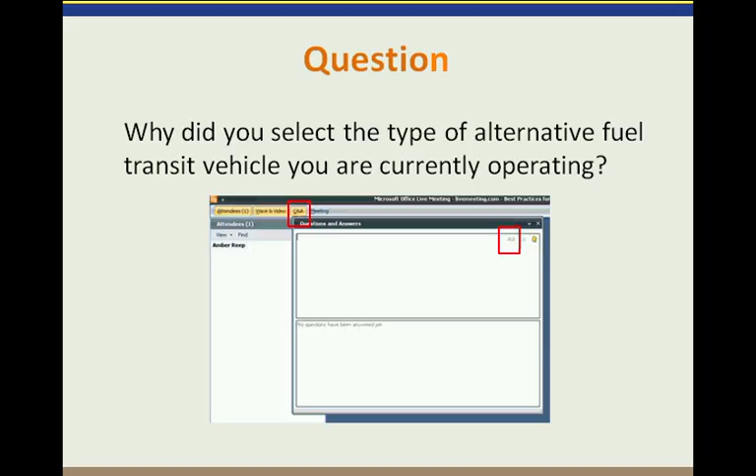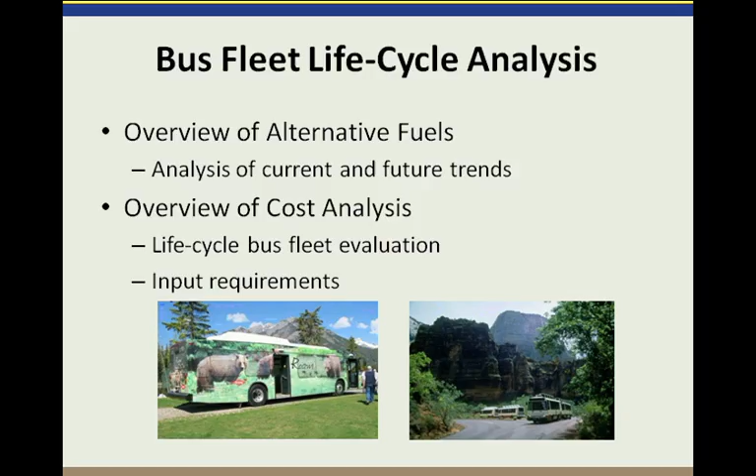Thank you again for sharing the results of our polling questions. I'd like to get started here with just giving an overview of the different fuels that we have analyzed for use in transportation, and then get into a little bit of the overview of how this cost analysis will work.

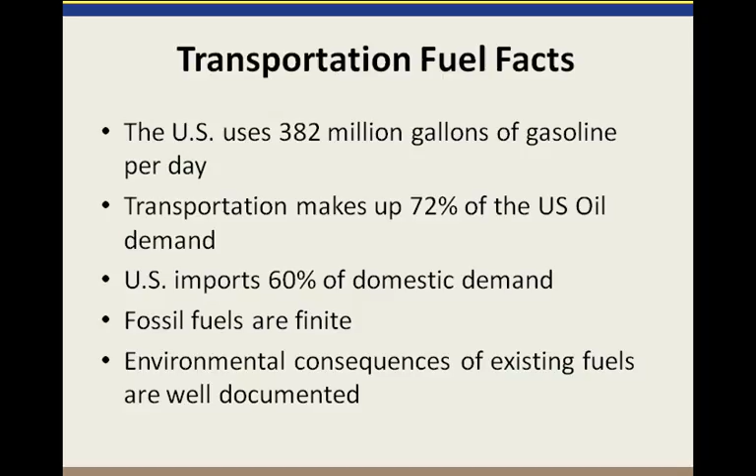As transportation people, why should we be concerned with alternative fuels? It sounds like a pretty obvious question with obvious answers, but just to put it into perspective, when you look at industrial, residential, commercial, and transportation sectors of our economy, transportation makes up almost three-quarters of the demand for oil in the United States today. I think it's pretty well known that we're importing well over half, and have been for over a decade, the oil that's required for our domestic demand. I think we're pretty aware of the environmental issues associated, particularly greenhouse gases and other regulated emissions. And the fact that we run this transportation system in this country based on a finite resource, we need to keep striving to find cost-effective and more environmentally friendly fuels to fuel our system.

So as we think about trying to help you decide what may be the most appropriate alternative fuel for your fleet that you're running at your parks or at your facilities, this model that we're going to talk about today is really a decision support tool.

It's not going to tell you the answer, because there are lots of considerations that go into this decision making. First of all, what is it that you're trying to achieve? Are you trying to demonstrate that your agency is working towards energy independence? Are you at a park where noise, air quality, or groundwater issues are what you're trying to deal with?

Is the fuel even available in an economic manner in your region of the country? If you bought some new whiz-bang sort of vehicle, are you going to have the technical support to service these vehicles because of their maintenance?

Some fuels are far more appropriate for warmer weather climates and experience some difficulties in colder weather. If you're having to turn your fleet pretty quickly and it's in constant use, some fuels require significantly longer fueling times than traditional diesel or gasoline. Same thing with vehicle range.

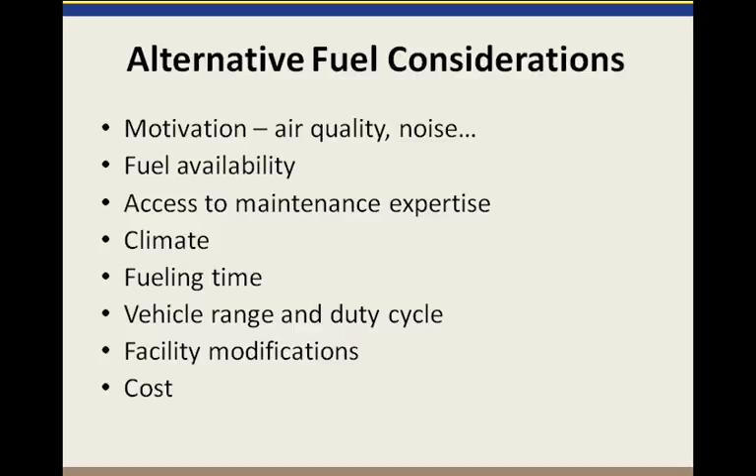The top bullet and the bottom bullet, at a minimum, are considered in this model as a way to help guide you towards your decision as to what alternative fuel vehicle you may want to purchase. I'm going to try to quickly go through this set of fuels, and what we've developed is a fairly simple, almost like a Siskel and Ebert thumbs up and thumbs down approach to the pros and cons of the different fuels.

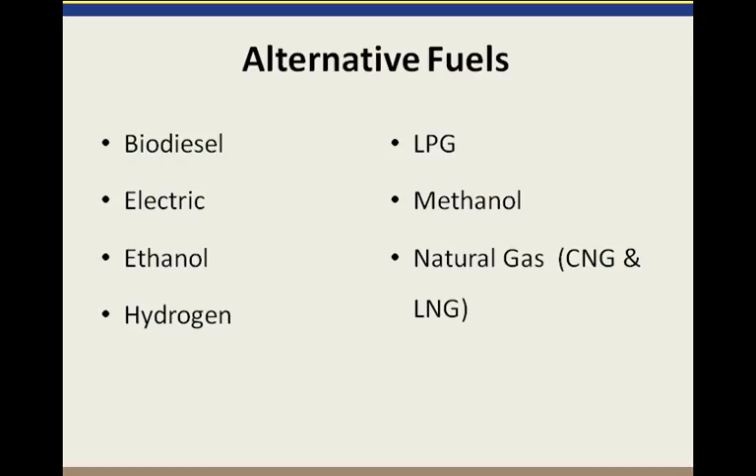We'll talk about electric, although not technically a fuel. We put that in there as well because of the use of electric vehicles and their up-and-coming use. So as a baseline, we'll use gasoline and diesel, where because of carbon dioxide, carbon monoxide, NOx, volatile organic compounds, and so forth, we give them a thumbs down for emissions.

Supply is not intended to mean how much of it there is in the globe, but whether it's fairly easily accessible in the U.S. market. Cost, safety, delivery - that's a little bit different if you're talking about some of the exotics like hydrogen, or even natural gas if you're not near a natural gas pipeline. And then the energy content, which is basically measured off the gasoline diesel base of BTUs per gallon, because the lower that number is, the more of it you will need to generate the same energy. Conversely, the higher that value is, the less of it you will need.

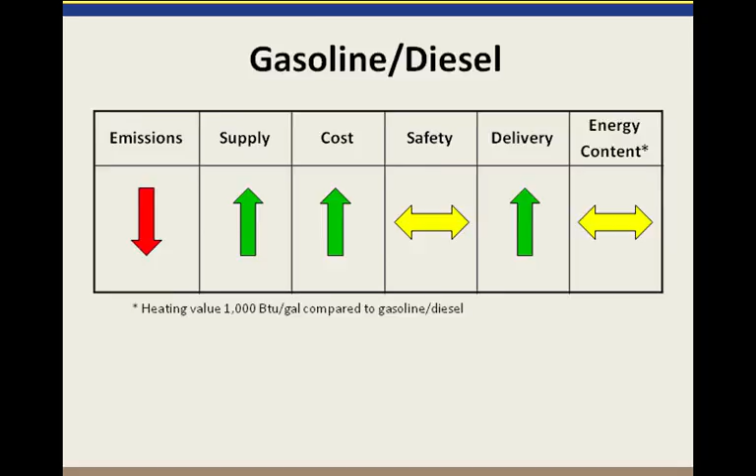So let's start with biodiesel. We refer to biodiesel and ethanol and these biofuels as really sort of transitional fuels to take us to our energy future. I noticed that several of you are using biodiesel, but for those of you who are not using it, it does have some very beneficial air quality attributes.

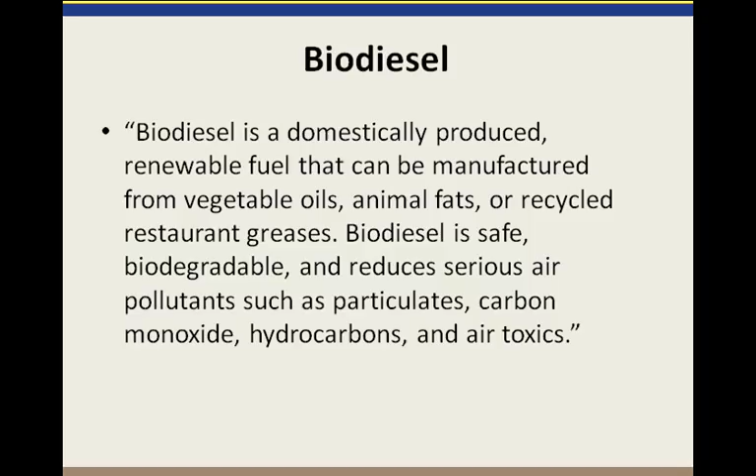But I want to say here, biodiesel is not just yellow grease from the McDonald's down the street, or from a restaurant that you may have in your park. There's an ASTM standard for biodiesel, and although there are hobbyists who run vehicles on straight yellow grease, restaurant greases can be used as an input to make biodiesel. But in terms of the reliability of your engines, we recommend that you use certified ASTM biodiesel.

Now we'll talk a little bit about compression ignition engines and spark ignition engines. Very basically, spark ignition engines are like a gasoline engine with a spark plug. Compression ignition engines are like diesel engines that do not require a spark plug, but the combustion itself ignites the next cycle.

The main feedstock of biodiesel in the U.S. these days is soybean, but it can be made from waste products, canola, peanuts, cottonseed, many different inputs. We'll talk about this with ethanol as well. The controversy over biofuels when food stocks are being used as inputs can be fairly controversial and a legitimate concern for people using these.

You can use biodiesel at 100% blend, that's called B100. The most common use is a 20% biodiesel, 80% diesel blend called B20. You can find commercially available blends from B2, B5, all the way to B100.

So, pros and cons. You can use biodiesel without virtually any modification if you're using it in the B20 blend. There are more and more production facilities creating and blending this stuff all over the United States. With the new sulfur standards for diesel, the ultra-low sulfur diesel, biodiesel could actually help with one of the drawbacks of the new diesel fuel in terms of adding lubricity to the engine so it doesn't wear out. It also has some fairly decent air quality emissions profiles.

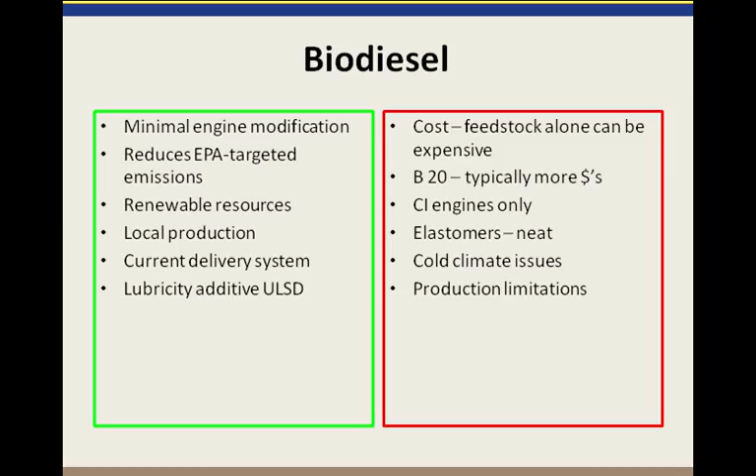We give it a thumbs up for emissions, neutral on supply and cost. As we watch the cost of biodiesel, depending on the area of the country you're in, it can actually run lower than regular diesel or ultra-low sulfur diesel, or can run a little higher depending on local markets. It's relatively the same in terms of energy content, and on delivery and safety, we give it the thumbs up.

When I say delivery here for biodiesel, the stuff actually requires no additional refining or anything. If someone locally is producing ASTM standard biodiesel, they could just splash blend it in a tanker truck, and it actually just mixes up on its way to deliver to your facility.

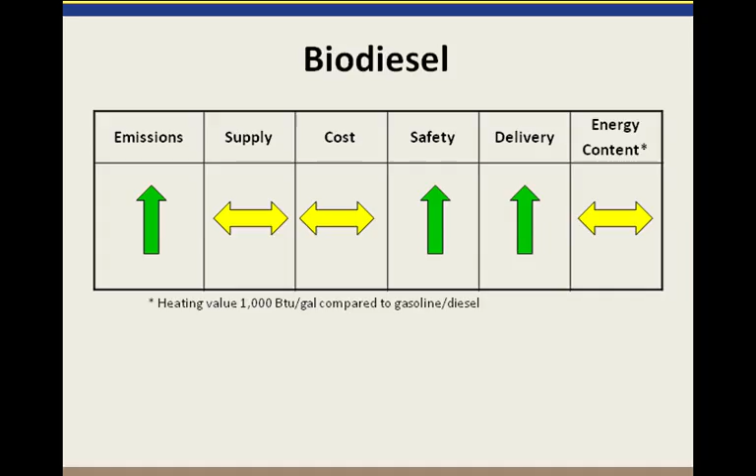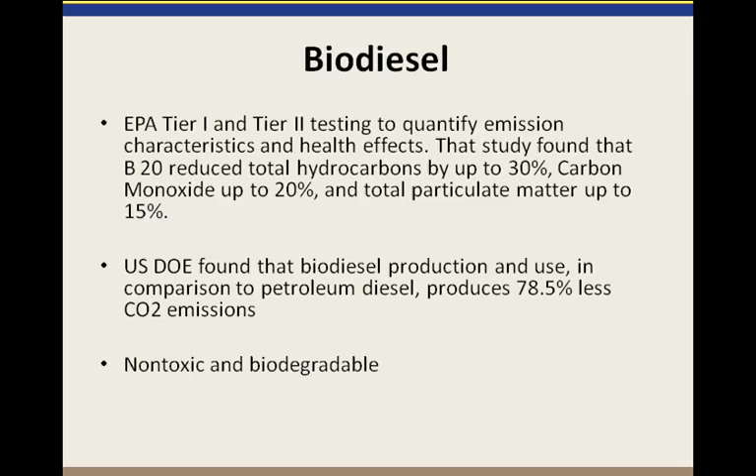It is non-toxic and biodegradable, and you can see some of the statistics there that I've put on the slide in terms of what EPA and DOE have found. Particularly the carbon dioxide emissions are a real plus with biodiesel. And again, it's readily available and easy to implement, particularly at the B20 blend.

Now, ethanol. A lot of news these days about ethanol. Well, what is it? It's essentially alcohol - moonshine, essentially. It's fermented from virtually anything that grows. Unfortunately, most of the ethanol being produced in the United States is coming from corn, and there's competition for land, fertilizer, and agriculture capacity.

A couple of years ago, there was actually a run-up in food costs because of a shift of agriculture production for the use of ethanol. Ethanol is used in the spark ignition engine, and this is the typical engine you'd find in your automobile - it uses a spark plug. It's been around as a fuel for a very long time.

It goes back early in the last century, but in the 70s, those of you who are an old guy like me remember gasohol, which was a blend of 10% ethanol, 90% gasoline. In the oil embargoes and shortages of the 70s, this became a pretty popular fuel, particularly in the Midwest.

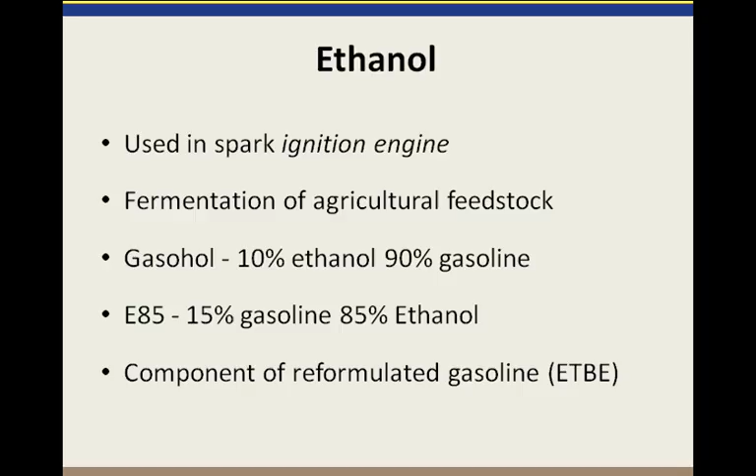Well, the advantages of ethanol - we're going to talk about methanol, which is another kind of alcohol, in a second. While ethanol has lower energy density than gasoline, it is higher than the other alcohols. It can come from renewable feedstocks - it can be made from waste grass clippings, waste food products, anything that you could distill.

It is water soluble, and it has been being introduced into fuels, particularly in air quality non-attainment areas, where they have to add oxygenates to the fuels.

ETBEs have replaced MTBEs because of methanol's really toxic nature and the issue of leaking underground storage tanks and methanol getting into the groundwater. Ethanol has taken over as an additive.

Now, most vehicles on the road today that have been built since the 80s can use up to a 10% blend of ethanol. But this E85 that's being promoted around the country, which is 85% ethanol, requires a flex fuel vehicle, and at last check there were over 6 million of them.

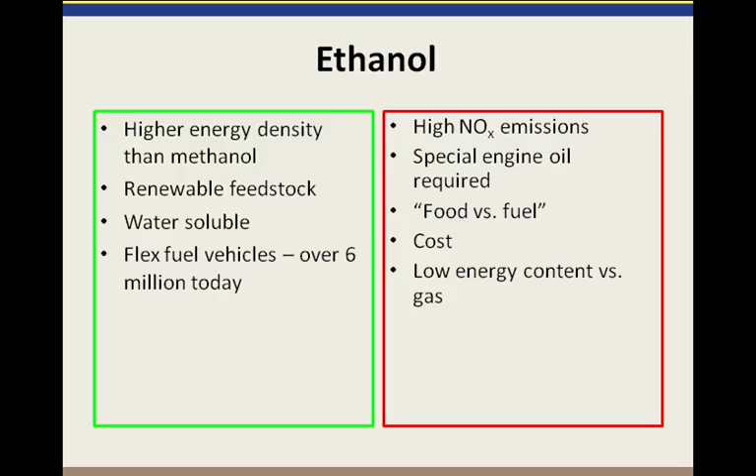The downside, depending on the feedstock in the market for what's being used to make the fuel, is it can be more costly, particularly without subsidies. We get into this competition by using food stocks as inputs. It does not have a terrific nitrogen oxide emission profile, and it has about 30% less energy content per gallon than a gallon of gasoline or diesel.

It does, because it's so highly oxygenated, have a terrific impact on reducing greenhouse gas emissions. Although there's lots of debate on ethanol, and some scientists have shown that it requires more energy input than what you get out. There is CO2 that is released as you distill whatever you're doing to make the alcohol. The counter argument is that because it's being made from crops, the typical CO2 cycle takes care of that, and there's no new CO2 being introduced into the atmosphere.

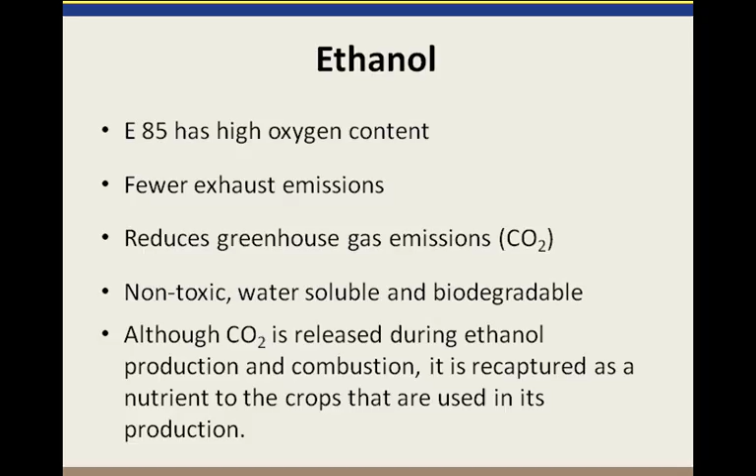So we give it a thumbs up for emissions, neutral on supply. Cost, we give it a thumbs down as it relates to gasoline, because typically it does run a few cents more, and when you combine that with the fact that you need about 30% more of it to run, you see the energy content with the red arrow pointing down. Those are the two negatives.

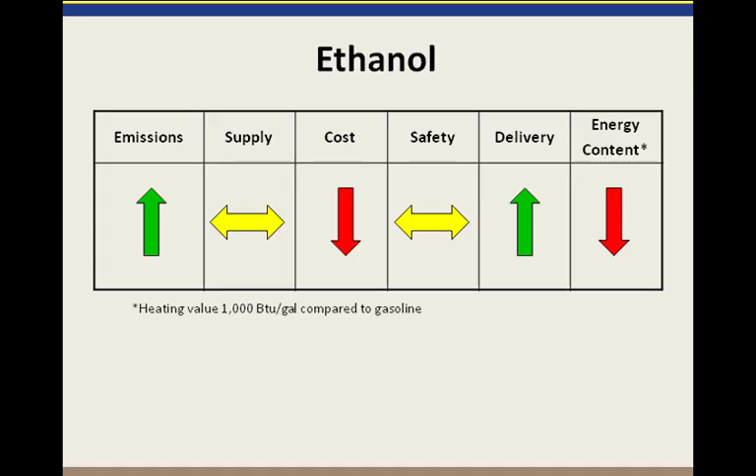Again, there's no issues, particularly at lower concentrations, with delivery or fueling infrastructure or that sort of thing. We've found that Mammoth Cave is using ethanol in their fleet vehicles, and I think that may be the only one. Now, what we are beginning to see - we'll talk about hybrid electric vehicles in a few minutes - is the use of E85 in engines that are used in hybrid electric buses, particularly the heavy-duty large buses.

Methanol I won't spend a lot of time on. This was once thought to be a viable transportation fuel. It is some very nasty stuff from a handling and an environmental standpoint. But it's alcohol that's made from the distillation of wood.

Now there are some small scale demonstrations in the U.S. where methane from landfills is being captured to produce this as a fuel, and that's pretty laudable. But on any wholesale level, people have pretty much, for the time being, given up on methanol as a viable transport fuel.

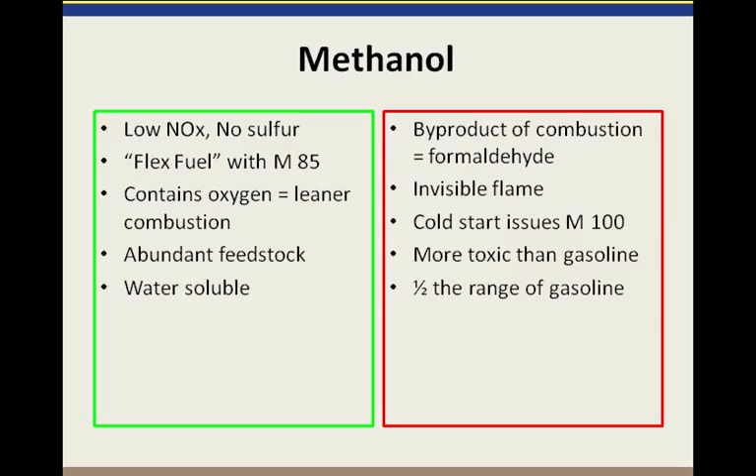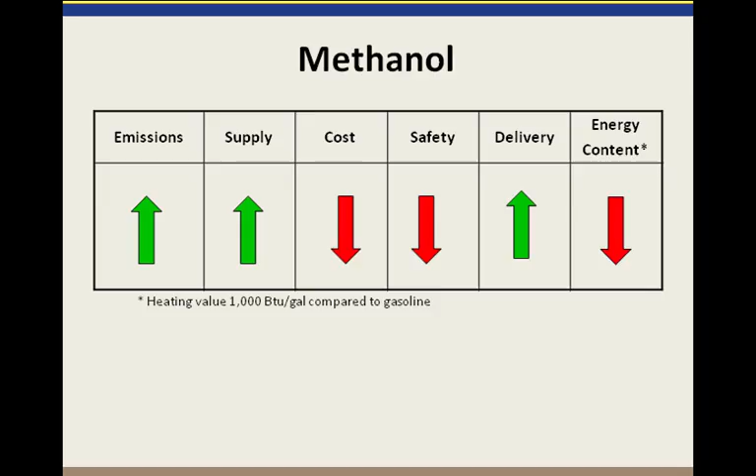Because of the low sulfur and low NOx, we've given it a thumbs up for emissions, but on energy content, safety - because of the invisible flame issue and also the toxicity level of the stuff - we've given a fairly negative rating. And again, it's not particularly relevant in that not many folks are using this anymore as a transportation fuel.

Excuse me one second. I'm battling a cold here, and I don't want to cough in everyone's ear.

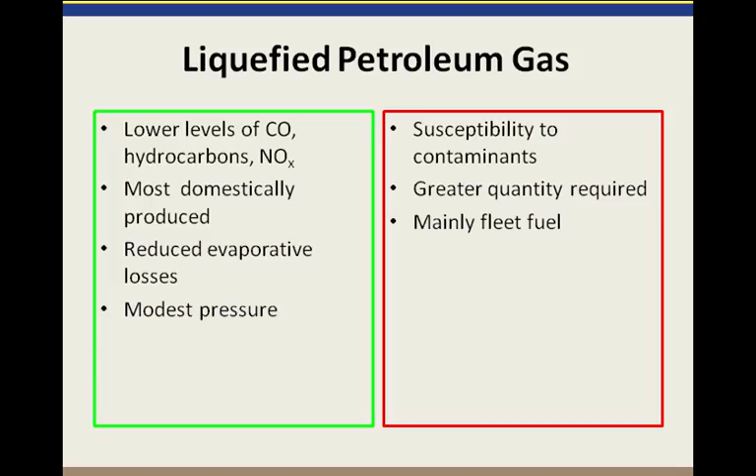So where it is used, it's mainly a fleet kind of fuel, which would be relevant for you all, where there's centralized fueling facilities. But there are some downsides, including its lower energy content, which requires more fuel to go an equal distance.

On the rating scale, the LPG, depending on what part of the country you're in, from a supply standpoint, you may or may not be able to get it. And to run a vehicle fleet, you need more than the 10-gallon or 20-gallon containers you use for your barbecue.

But it does have a really nice emission profile, relatively less expensive than gasoline or diesel. And as I said earlier, the energy content is probably its biggest drawback.

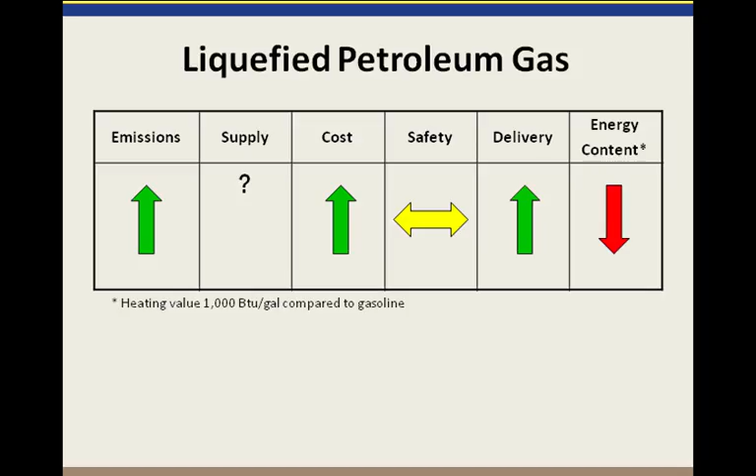Again, Acadia, Zion, and Mammoth, if you're interested in talking to folks that are using this and getting their experiences, as Amber said earlier, there's a resource available in the handouts that gives you the contact information.

Now, as I said in the very beginning of the presentation, we were going to talk about electric. It's not technically a fuel, it's an energy delivery method.

And when you think about electricity and its pros and cons from an environmental standpoint, you've got to think about the wells-to-wheels concept, the whole energy chain. If the electricity being generated is coming from some high-sulfur coal from an antiquated power plant, then while locally you may be gaining in terms of air quality, the point of generation may be a pretty nasty thing.

Even with the amazing advances in battery technologies, it continues to be a fairly poor transportation source of energy, because the batteries weigh so much, and in transportation you've got to drag around the energy source with you, unless you're getting electricity from a catenary on a light rail system or that sort of thing.

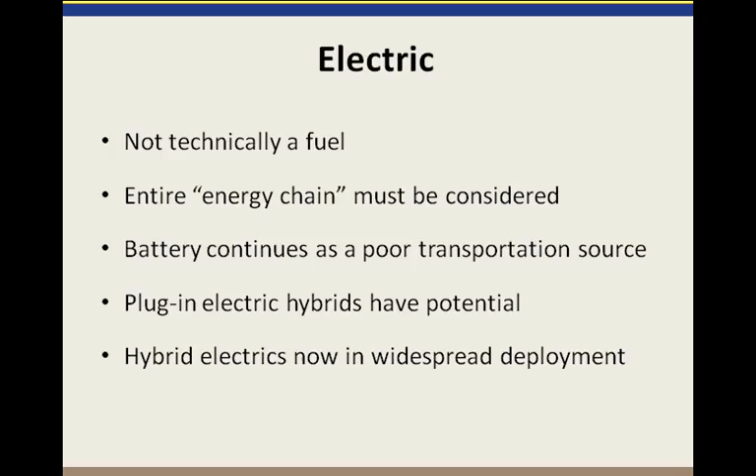There are plug-in hybrid electric buses being developed and deployed. I'm not aware of any in the U.S. yet, but in Asia they are coming on.

Without getting into a technical discussion about the different kinds of hybrid electric drives, I'm going to talk about a very simple one called the series system, which seems to be the choice for a heavy-duty bus.

When I say heavy-duty bus, I'm talking about the 25 to 40-foot buses that would be used to carry anywhere from 20 to 40 people. They're really moving away from the really complicated systems that you see in the Toyota Prius, Honda Civic, and more toward a very straightforward kind of system.

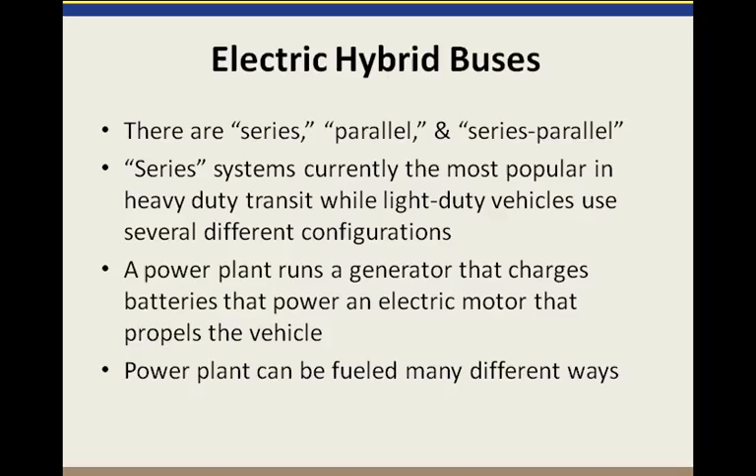Which I have a slide here, basically what you have is an electric bus. The bus is driven off of a giant electric motor, and then the engine just turns the generator, which replenishes the battery or gives direct power to the motor if it needs it.

Of course, there's sophisticated regenerative braking systems and lightweight materials and those sorts of things that go into these buses that help extend their range. But generally, that's the way it works.

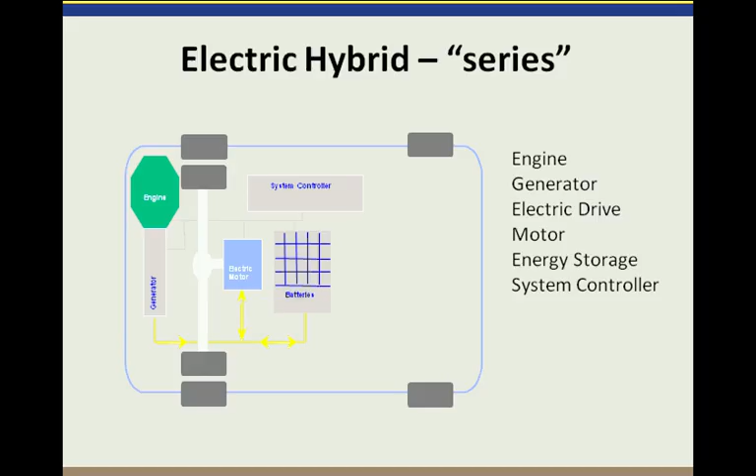Engine, which can be fueled by gasoline, diesel, E85, or hydrogen, runs a generator. Generator creates electricity, runs the electric motor, and stores energy in the batteries for when more energy is needed to go up a hill or whatever.

When we look at buses, that's not to say there aren't pure electric vehicles out there, and there have been plenty of demonstrations of the use of them.

Excellent vehicle to be used where noise is a consideration, and you don't want that in a park or some environment where you're very sensitive to the noise that one of these big buses can put off. But because the battery technology hasn't advanced to the point where you can get the range out of these things, pure electric buses in a lot of applications have been waning.

This is, again, one of those things where you have to think about the operating environment that you're in. If you're running these vehicles in the Everglades where it's flat and there's no hills, you could get a lot more range out of them than if you were trying to move through Going-to-the-Sun Road up and down the mountains in Glacier. You wouldn't get very much range out of an electric bus.

So what has evolved are the hybrid electric buses. And as I say, any kind of an engine can run these. So we see CNG engines running them, even hydrogen internal combustion engines, which we're going to talk about in a few minutes. That's not a fuel cell. It's actually using hydrogen in a liquid form in a traditional kind of an engine. The huge advantage to it being the air quality benefits of using hydrogen as a fuel. But even in the urban bus settings, we're seeing E85 being used to, again, power an engine that runs a generator, to propel electric engine to move the bus, and CNG.

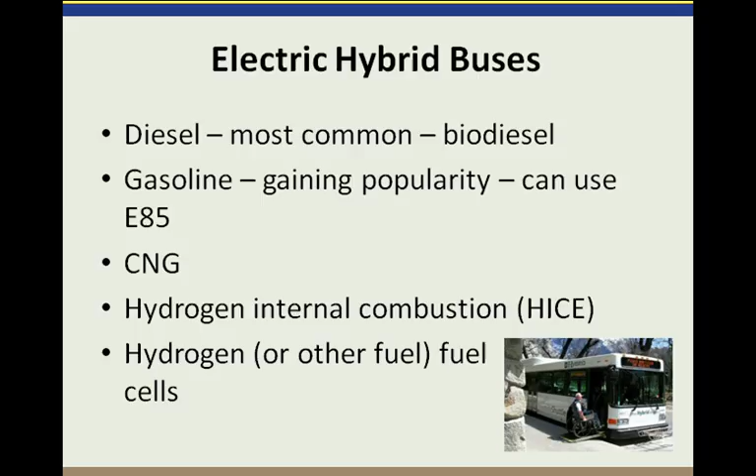Now, I mentioned fuel cell, and fuel cell has sort of been the holy grail of transportation technologies, and I've been involved in this for several decades, and it always seems to be just out of reach. It's another 10 or 15 years shy of commercial viability. But what the fuel cell is, it's essentially a battery that you add fuel to.

The reason that the hydrogen fuel cell is such an attractive potential source is that water and heat are the only byproducts aside from the electricity that you're getting if hydrogen is used in a fuel cell. Now, it's not a new technology. As you can see, it was invented in the 1800s. Other fuels can be used, but again, the holy grail has been the hydrogen fuel cell because of the only byproduct besides the energy that you get is water and heat.

Extremely expensive. Still not sure of the life cycles of these things.

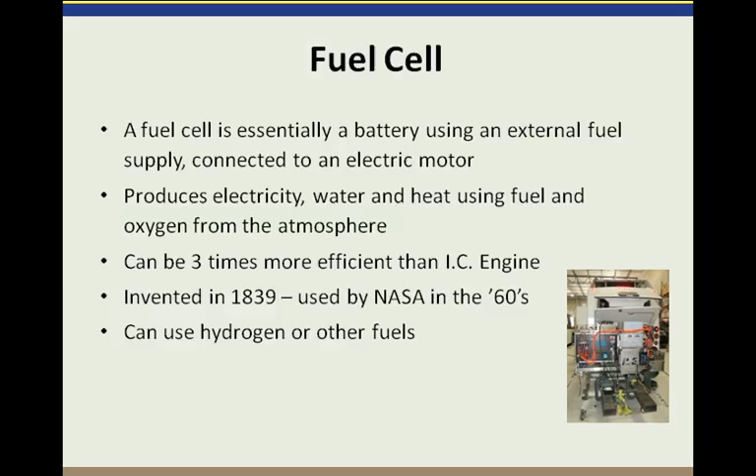So lumping all the electric together, we'll say on the plus side, there's no tailpipe emission if it's a pure electric bus, and even if it's a plug-in hybrid vehicle, agencies and individuals will be able to soon take advantage of charging these things off peak when smart grid technologies come to the country universally. And in fact, you'd be able to sell energy back to the grid at peak times if your vehicle were to be plugged in.

But electricity in general, I think one of its biggest pluses as a transportation energy source is the fact that you can invest in the air quality mitigation technologies at a power plant at a much heavier rate than trying to do this with millions of vehicles moving along the highways. You can spread the investment over the lifetime of a power plant as opposed to investing in something on vehicles that are only going to last 10 or 15 years.

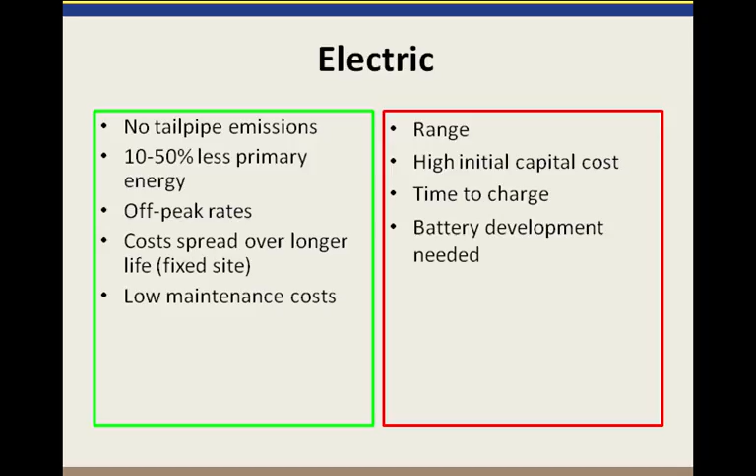Again, the downsides, we've talked about the range. Because of the sophisticated regenerative braking in batteries and other materials, they can cost a lot. And in our example, you'll see what a full-size bus cost differential is for a hybrid electric versus a traditional diesel-powered bus. So the only energy source that we give two thumbs up for emissions and supply, again, cost.

We're doing some more research. My colleague Cecilio and I are actually doing some more research now on the relative cost per kilowatt hour energy equivalent to how much traditional fuels cost. But we give it a thumbs down on energy content mainly because of the battery capacities and the range.

I think we have a question.

Before we move on to the next fuel, somebody actually had a question about LPG, liquefied petroleum gas. They were indicating that Bryce Canyon considered this technology in the past and was very concerned regarding high altitude performance. Could you comment on this? As far as elevation, theirs was 6,200 to 9,200 feet.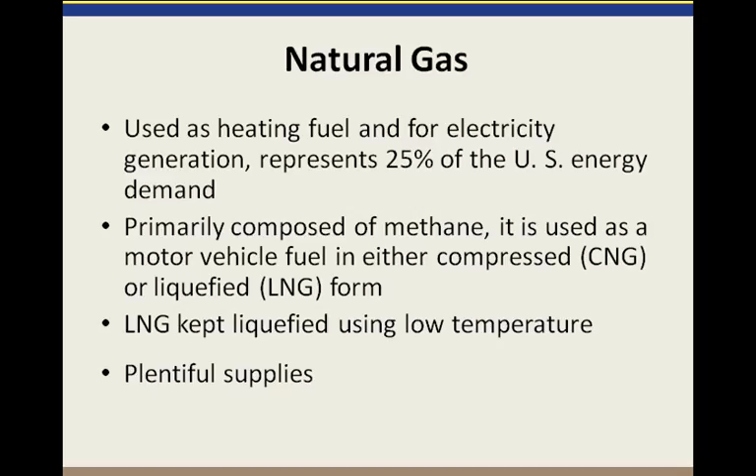For transportation, we think of it and deal with it in two forms, compressed and liquefied. There are plentiful supplies in the U.S., but they're not without their issues. There's been a lot of recent publicity and controversy over some of the extraction practices being used, particularly fracking and what that can do to groundwater and drinking supplies.

Dealing with it in a compressed state, which is compressed to several thousand pounds per square inch, we get a huge reduction in carbon monoxide versus diesel or gasoline, and NOx. It can be used in a bi-fuel environment. CNG is used in a spark ignition engine, so you could have a vehicle that ran on E85 and CNG. It could switch back and forth if you ran out of CNG and had a backup fuel supply.

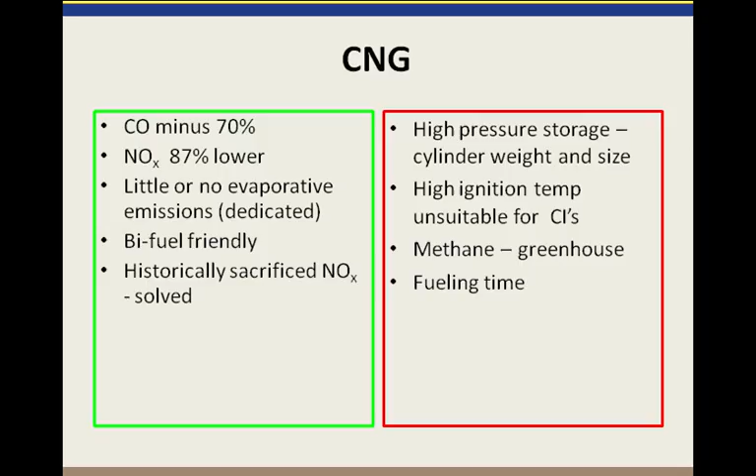Those of you who have been around this know what these things look like. They're huge tanks, typically installed on the roof of the vehicle. One of the two major drawbacks is if the fuel is vented somehow during fueling, it escapes, and there are greenhouse gas emissions far worse than just using a traditional diesel bus, depending on how much you vent into the atmosphere. It also takes quite a long time to refuel, depending on the size of your tanks, compared to diesel, gasoline, or a liquefied fuel. And there's energy used to compress this stuff even at a fueling station, which has to be considered in terms of cost and environmental consequences.

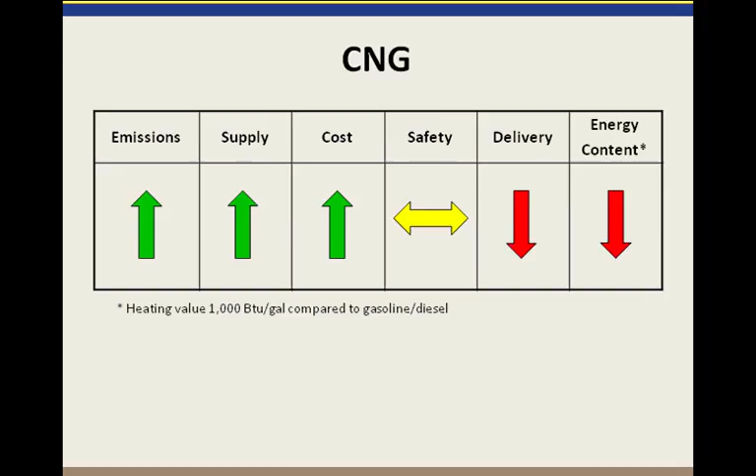LNG, which is natural gas used in its liquefied form, has all the benefits of CNG, plus you can get better range. The downside is you've got to keep it at very low temperatures in order to keep it in its liquefied form. So there's a trade-off between the energy you can put on a bus in liquefied form and the hassle and logistics around keeping it so cold. That's how you get the range.

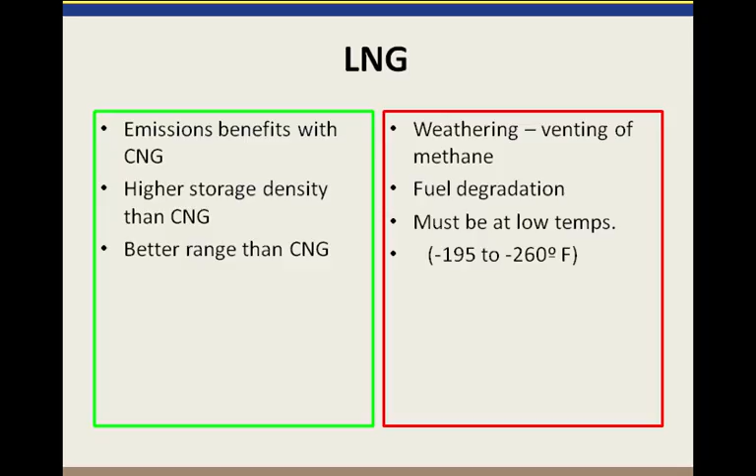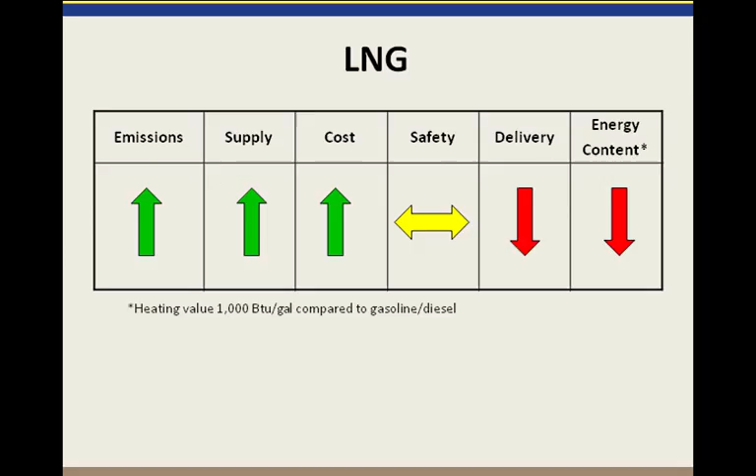With CNG, you have to compress it, taking time to force that gas into the cylinder to get up to around 4,000 psi. But again, you have the same issues if it vents into the atmosphere during fueling or maintenance of a bus, it has serious greenhouse gas issues. Same sort of pluses and minuses for LNG as CNG. It's not nearly as popular because of the difficulty of handling this stuff at such low temperatures. And the last fuel I'd like to mention is hydrogen.

As we were talking about electricity as an energy delivery medium, we talked about hydrogen being used directly as a liquid, or could be used in a fuel cell to generate electricity. It comes from the most abundant element on Earth. You can get into some environmental issues depending on how you produce it. Most of the hydrogen used in the United States in commercial applications is produced through steam reformulation of natural gas, and there is quite a bit of CO2 associated with that production.

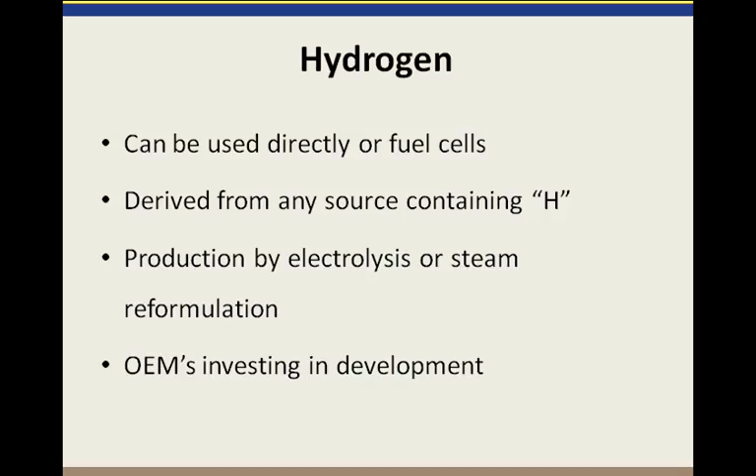Hydrogen can also be made through electrolysis, where you use electricity and water to separate the hydrogen from the oxygen and capture the hydrogen. It's still very expensive in terms of the energy it takes to get that pure hydrogen out of the water. There's been a lot of investment, although not as much as I'd like to see, by the original equipment manufacturers in trying to bring this to commercial application and fruition.

I think we talked about the pluses and minuses already, so we talked about the pluses. Probably one of the two biggest drawbacks at this point is the lack of a distribution system for it. You can't just stick it in a pipeline after you send through a batch of diesel fuel.

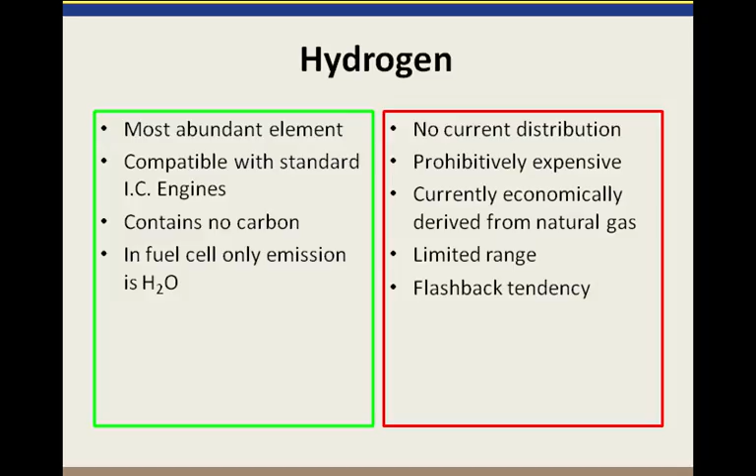You can produce it on site, and we've seen that. We've seen that out at Sunline Transit in Palm Springs, California, where through solar photovoltaic cells they actually produce some of their own hydrogen from solar energy. And in Oakland, they produce it through steam reformulation of natural gas, then compress it themselves, and they're running three full-size hydrogen fuel cell buses as part of an FTA and National Renewable Energy Laboratory demonstration project.

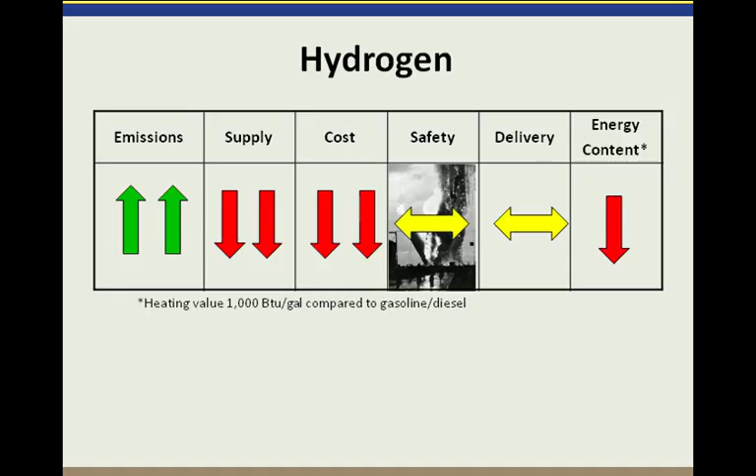Super emissions supply, again, it's very tough to get. The current cost per gallon equivalent is probably on the order of $12 to $15 per gallon equivalent. And again, on a per gallon equivalency basis, we give it a thumbs down.

This vehicle in Hawaii, I'm guessing, is a hydrogen internal combustion fueled van and not a hydrogen fuel cell van. Here, hydrogen is used as a fuel, just like gasoline, in what would look like a typical kind of engine, with all the benefits of hydrogen, and not really anywhere close to the expense of a fuel cell.

So thinking about the future, I wish this were my original quote, but in terms of trying to reduce our dependence on oil as the sole transportation fuel, from an environmental standpoint and an energy security standpoint, I think there isn't a single strategy that's going to take us there. It's not a silver bullet, but it's more like silver birdshot. As I said in the beginning, with transport using almost 72% of all the petroleum in the U.S., that's not a sustainable future, and we do have alternatives that are available today.

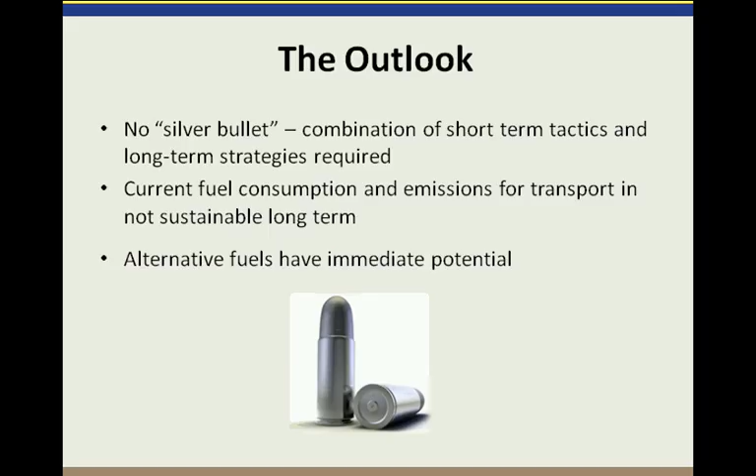Particularly the transitional fuels we mentioned in the beginning, biodiesel and ethanol. It's a little easier for fleet managers to be on the leading edge because some of these fuels require investment and know-how in the fueling infrastructure. So a centralized fleet with people who are technically competent and trained to deal with these vehicles makes it a lot easier than the average one or two vehicle individual or organization.

In terms of what we need to do as a country, and I may be getting a little off point here, I think that increasing the use of public transportation and more aggressive fuel efficiency standards, which have begun to be implemented, will help us get there.

What we try to do is develop a tool to help fleet managers and agencies answer the question, either for themselves or for their board or stakeholders, what would be the cost and what would be the impact of implementing these alternative fuels, notwithstanding all those other issues we talked about before, your operating environment, your climate. We were trying to get at the total annualized cost and the total social annualized cost. We talked about the advantages of the emission profiles of some of these fuels, and what that translates into in terms of societal savings over the useful life of a bus. So these were the two main things we were trying to get at.

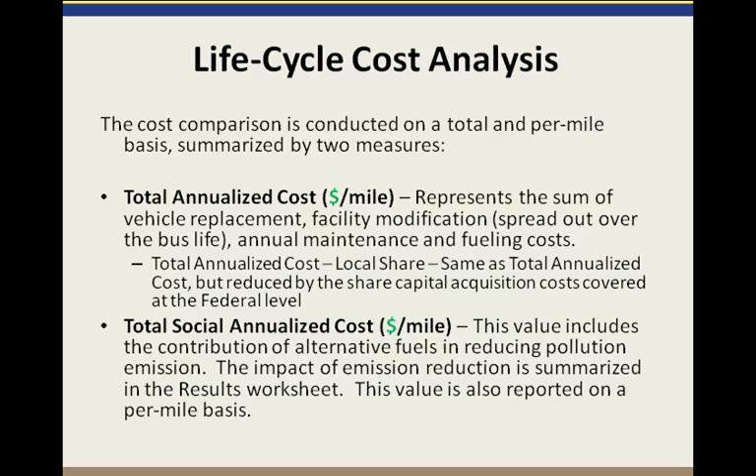I need to thank the Florida Department of Transportation for funding us to create this model, and we're in the process of gathering new data to keep it up to date. One of their concerns was that transit agencies, typically run by a board of citizen volunteers, while well-intentioned, will read an article about a bus that runs off of chicken guano and want to know why their agency isn't implementing these environmentally sensitive things. So it was a way to come at this decision from an objective manner and give people some factual basis from a cost and agency and societal perspective on the pros and cons.

It required lots of cost data, because if you're evaluating this for the first time, you won't know what the operating cost of a diesel hybrid electric is versus others. So what we did was inventory many urban transit agencies, since they had the largest fleets around the country, in order to get this information.

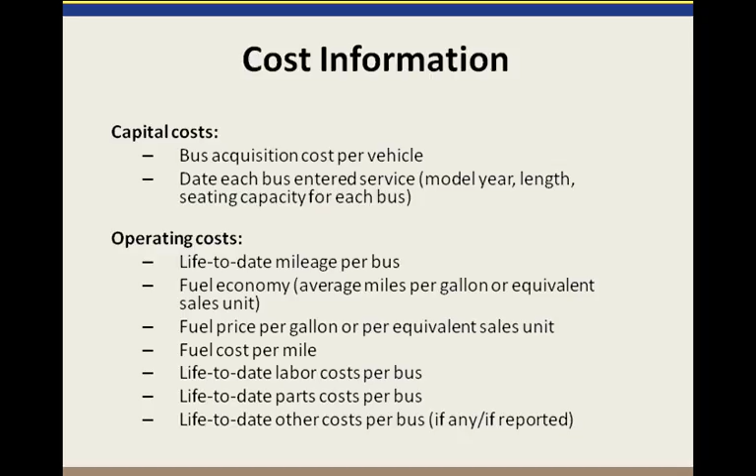We looked at acquisition costs, capital costs, and what it costs to run these vehicles. You see the list of what we were able to collect: life-to-date labor, parts, and fuel costs for as many different alternatively fueled buses as we could get hold of.

We also were grappling with infrastructure costs. You see a list of things here that can be captured, and most of them are captured in the model; some you just have to think about. Facility retrofits—we toured the maintenance facility out in Oakland, California, where they were doing a hydrogen demonstration, and it was extraordinary what they needed to put in place to service these vehicles in an enclosed area. We've tried to capture this so that if you want to evaluate CNG, for example, that cost will be captured in the model, as my colleague Cecilia goes through it for you in a few minutes.

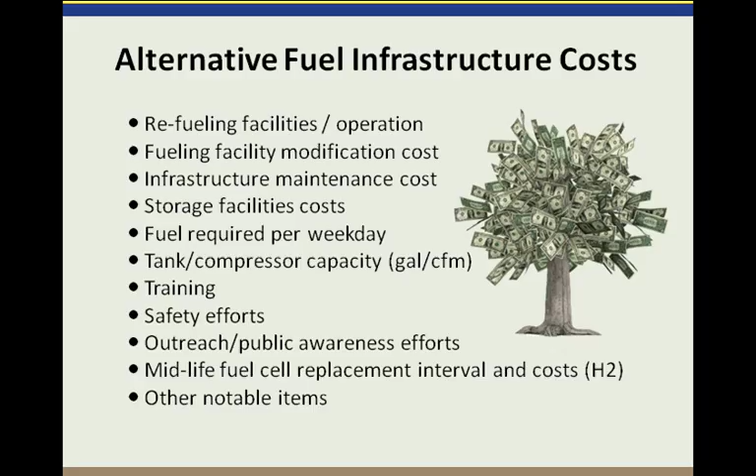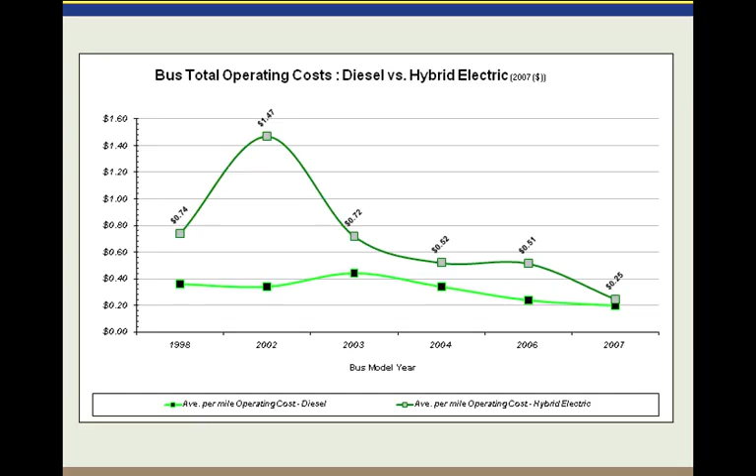So I'm going to take a break. Stop coughing in your ear, and at this juncture, I guess we'll take any questions, Amber.

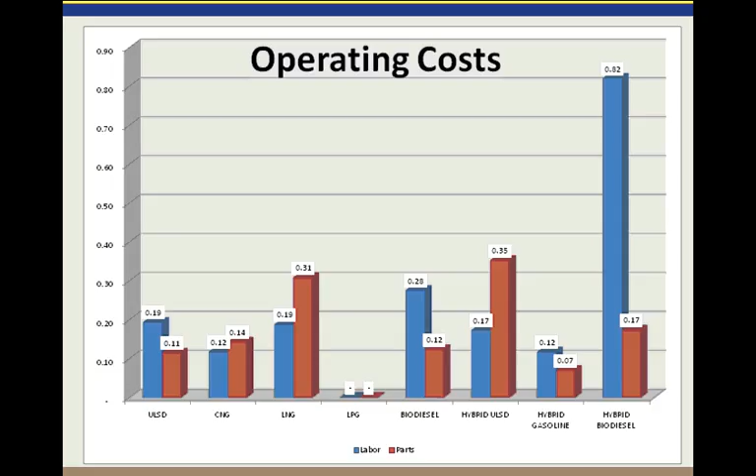And you can see the LNG. LPG, we did not get sufficient data to be able to report on that, and you can see the others through there. Again, this was based on this fleet of data from this population of vehicles that we were able to collect from different environments and different climates, zones, and different places where the vehicles go through different duty cycles, some suburban, some very urban.

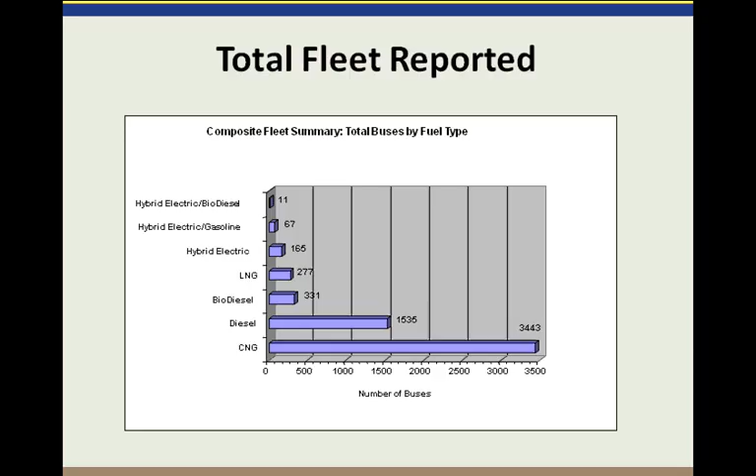I can say that these figures don't reflect the operating characteristics you may have, for example, in a national park setting, because it was a transit-related, public transportation-related database and model for those kinds of agencies. We're hoping that some of the flexibility this model gives will be applicable for your fleets as well.

I would have to say that the new ultra-low sulfur diesel and the after-treatment equipment that is now put on large heavy-duty buses make them pretty competitive from an air quality standpoint to CNG. That was not the case prior to the introduction of ultra-low sulfur diesel.

And just if you indulge me for a second, what that new fuel did, and it was mandated for use on highway beginning in January 2009, the sulfur went from 500 parts per million to 15 parts per million. It wasn't the reduction of sulfur itself that was creating the better emissions profile.

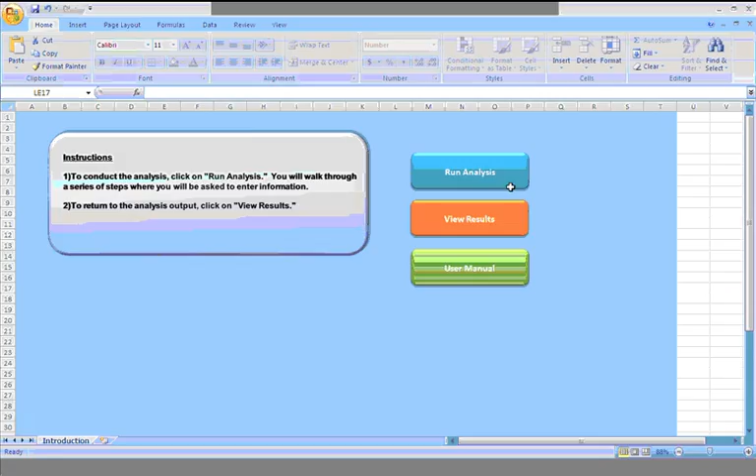The layout is as simple as clicking a button called Run Analysis, and a prompt screen will load up. Hopefully, if you have set up your screen resolution at this point, you can see it on your screen. At the very bottom of this screen, there is a set of buttons that allow you to go back and forth through these different steps. There are 7 steps in the analysis.

I'm going to follow these steps and first enter information on this analysis that I wish to run. Remember, overall, the purpose of this presentation is to introduce you to the model. We're not going to evaluate and help you right now to make a decision on a particular fuel - this is not the objective of the webinar. We are just going to show you this tool that, if you decide to go ahead and use it and properly customize it, can actually become useful in a selection process of these alternative fuels.

So I'm going to give a name to this agency. I'm going to keep in line with the theme of the presentation, so I'm going to call this agency Anywhere Refuge. You can type in, and to move on, you can use your mouse or the tab command on the keyboard. In this simple example, I'm interested in comparing as a baseline my current fleet of ULSD versus some alternative fuels.

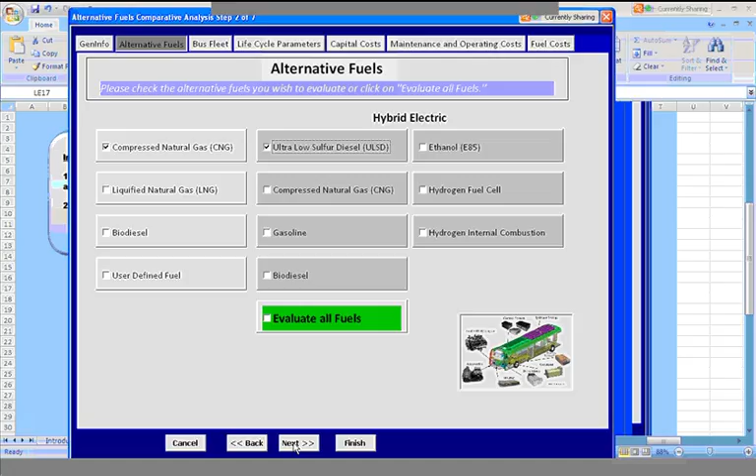I'm going to move on to the next screen. You'll see that you're prompted to enter information on your current fleet composition. You enter the date 2011, and by default we assume a bus life of 12 years. This model just works with the assumption that the bus life is on average 12 years. You can change this default assumption in the next tab. In this case, the prompt screen shows that if you have a current fleet, it goes back to 1999, which is 12 years back in time.

Now you can enter information on the right side about your future acquisition schedule, what you're planning to buy. I'm assuming in this example that we will be purchasing 10 new vehicles, and we're interested in evaluating the cost comparison between ULSD, CNG, and hybrid electric working on ULSD. I'm entering 10 as a very small fleet acquisition schedule. I'm clicking next and moving on to step 4 of the analysis.

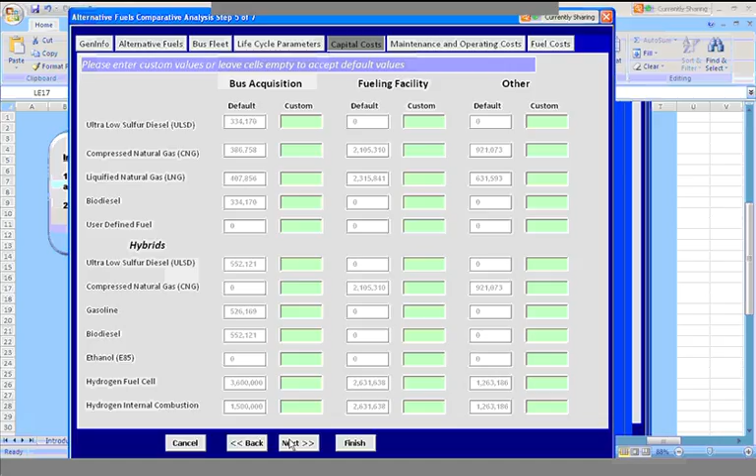We look at information that has to do with maintaining and operating the vehicles. Default values are in front of you, automatically loaded by the application. As Steve explained, these are average labor and parts costs for each one of the alternative fuel vehicles.

These are representative of half of the lifetime, because if you're looking at new buses, they are probably covered by warranty, and therefore parts replacement is part of the warranty scheme. So you probably have very low maintenance and part cost at the very beginning of the life of each bus. These values are representative of midlife of a bus.

We're going to accept the default values as probably more representative for us for this example, but always remember that each of the cells in the green color represents an opportunity to customize the values. And of course, if your vehicle data gives you historical information on similar vehicles in your current fleet with average labor and part replacement costs, you can override the default values.

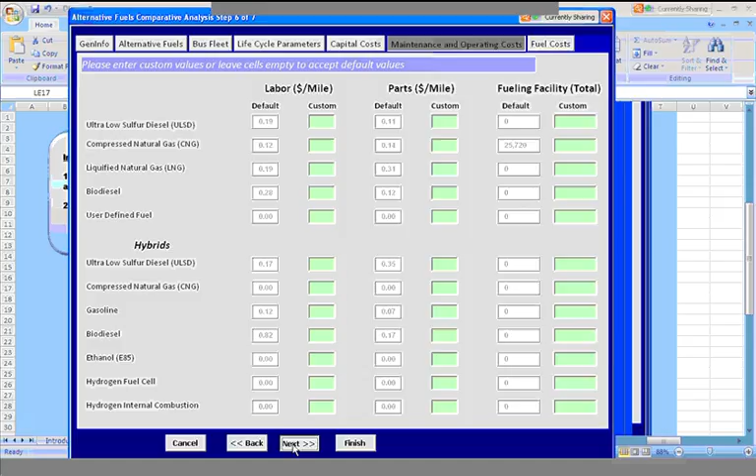I'm leaving the cells empty, accepting the default values, and moving to step number 7 of the analysis, which deals with fuel efficiency factors and fuel cost factors for each one of the alternative fuels. The default value in terms of fuel efficiency is 3.96 miles per gallon for ultra-low sulfur diesel.

Now the fuel costs, that's the question. Fuel costs tend to change quite rapidly, as we know when we go to the gas station, and that also applies for agencies purchasing fuel.

This information on fuel costs can be obtained by going to a specific website. Here we have a little question mark at the bottom right of step number 7 of the analysis. When I click on it, a splash screen opens up and tells you the following: if you have to update the default values, the alternative fuel costs, you click on the link below, which sends you to a website.

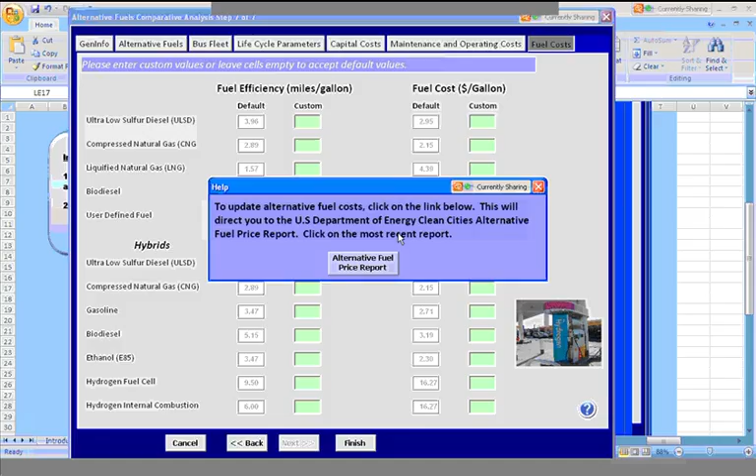I'm going to accept these at the moment as the default values. I'm ready to click on finish and see what the result of my selection and analysis is. So when I click on finish, immediately I'm sent to a worksheet tab. I'm going to zoom in so that we can discuss the results in detail.

As you can see, at the top left you have a summary of the information you entered on step number 1 of the analysis, and then results displayed for those fuels you selected. Specifically, you have results for ULSD, CNG, and ULSD hybrid electric.

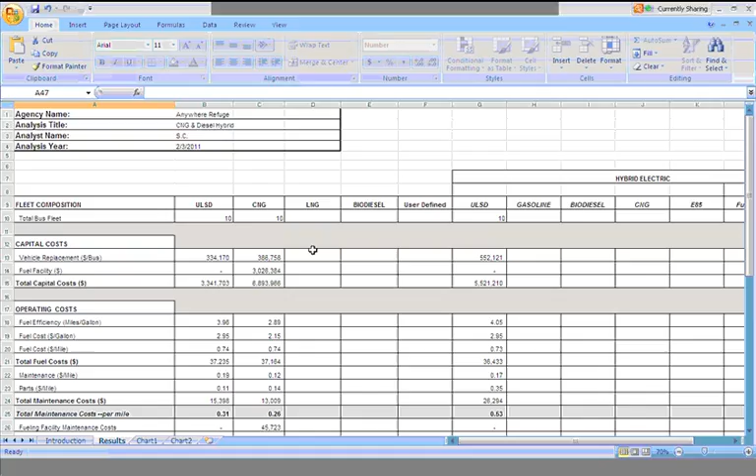The analysis is for a fleet size of 10 buses, and then we look at what really the gist of this analysis is all about: how much is it going to cost us on a per mile basis throughout the life of these buses to actually purchase them? So which one is really more cost efficient?

Now keep in mind the following, that when you get at this point, you have already overcome what is so-called a checklist. Are these fuels available near us? Are there any supply constraints? Are there any other environmental characteristics that prevent us from implementing this fuel? So before getting to this point, of course, you have done some preliminary analysis. This is what we hope to be a tool that can be useful to you.

When you get to this point, you have enough information to select a sub-list of all the alternative fuels that are out there. Considering the information at the point in time in which you are running the analysis, and accepting the default values of the model — the current fuel costs, the current fuel efficiency assumptions for each of the alternative fuels — you have, on an annualized cost basis, the cost per mile for running this 10-bus fleet.

You have over here, I'm going to scroll down and show you that, and probably zoom in so you can see it well. It's $7.65 per mile when it comes to the ULSD bus versus $12.91 when you look at the CNG bus. So it's quite a difference between CNG and ULSD — 7.65 versus 12.91. You say, wow, this is a big difference.

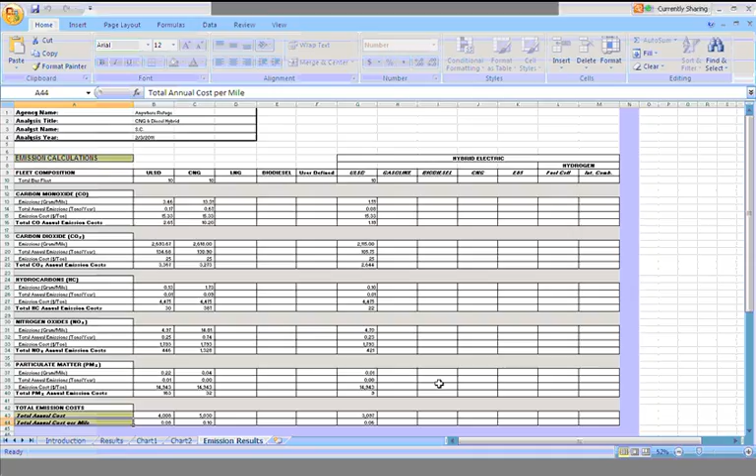You are also interested in looking at the emission impacts due to the choice of these alternative fuels. You click on the button over here where it says View Emission Impacts, and another work tab opens up, which reports the emission impacts for these alternative fuels. Again, I'm zooming in so that everybody can see better.

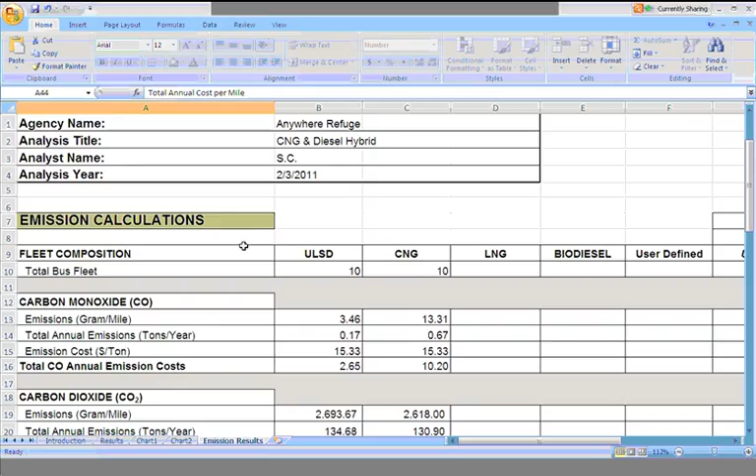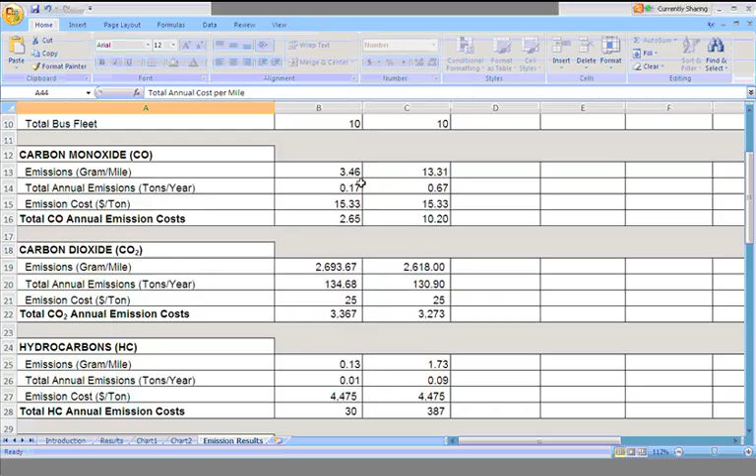Now at this point, I recollect the questions of some of the audience regarding emission factors as being affected by environmental conditions. The values you have here, the default values for emission rates for carbon monoxide, carbon dioxide, hydrocarbons, nitrogen oxides, and particulate matter for the alternative fuels including ULSD, these default values are average factors, representative of average conditions. It would be ideal to customize the emission factors further, making them dependent upon altitude, ambient temperatures, and other environmental conditions.

Yes, we have done that for another sketch planning application. I produced a sketch planning model that pulls from the Environmental Protection Agency's mobile emission model, using custom factors that account for ambient and altitude factors. We're working on an update of this model, and hopefully we'll have more detailed emission factors for this sketch planning application. But for now, these are just averages.

Now, the worksheet tab provides you with a summary of impact emissions for CNG, ULSD, and hybrid electric working under ULSD fuel, and also gives you an incremental total annual cost per mile when it comes to taking into consideration the contribution that choosing an alternative fuel will have on emission reductions for the environment. So we have an additional metric called total annual cost per mile, which includes the additional cost related to emission pollution to all users, to society as a whole.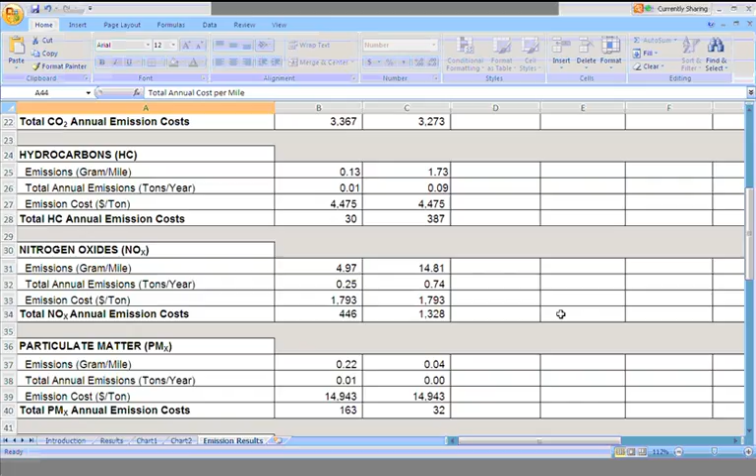When we talked at the beginning of the presentation about what it is you're trying to achieve through implementing an alternative fuel vehicle program, and I saw these numbers, it reminded me of my very first foray into alternative fuels. When you look at the particulate matter, if you could scroll back down, the number on the left is diesel, the number on the right is CNG. My very first foray into this was introducing CNG buses into an airport application, and the problem being solved was the soot on the canopy at the arrival and departure roadways. So again, that was an application where, all things equal, this was a better alternative for what the decision makers were trying to deal with.

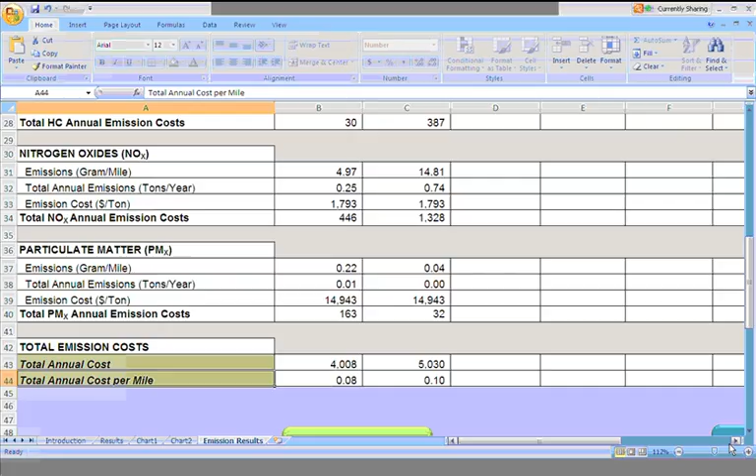I just want to interject. Yes, thank you. So, this workup provides you with an emission impact estimation for this analysis. There is one other element that is relevant to the analysis.

I'm going to switch back to the results of the cost comparison on a per mile basis. You have estimates which we define as just one number, how much it's going to cost on a per mile basis to run a bus with this alternative fuel and so forth. The question is, how reliable are these results, given that we know fuel costs are highly volatile? So we run the analysis at one point in time, and then fuel costs might change in the near future, they might go up. How is this going to affect my decision-making process?

So instead of presenting you with just single point estimates, we thought of improving the application and providing you with ranges of results. So instead of seeing just $7.65, or in the case of total annualized cost per mile, just a single point estimate, the question is, what are the ranges? Is there a minimum? Is there a maximum in terms of how this number is affected by assumptions with respect to fuel efficiency, fuel costs, and all the other parameters?

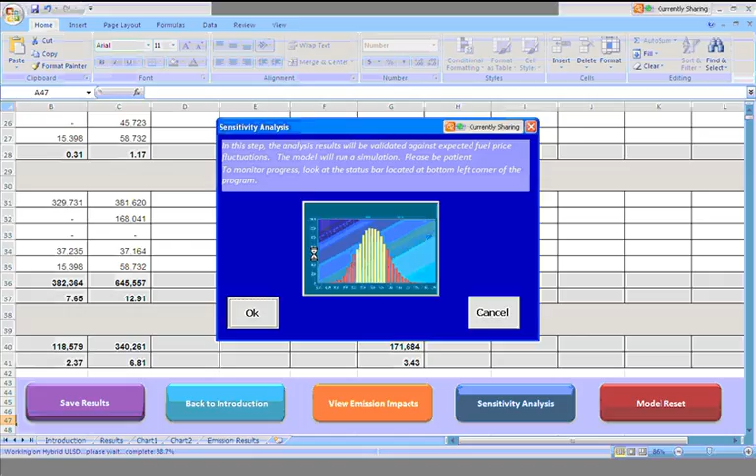What the model does at this point is run a so-called simulation. It takes the results and accounts for the volatility in fuel prices, so that at the very end it reports the results of the fuel cost analysis in terms of ranges, and provides you with a snapshot in figures and histograms, so that you can better inform yourself in this decision-making process.

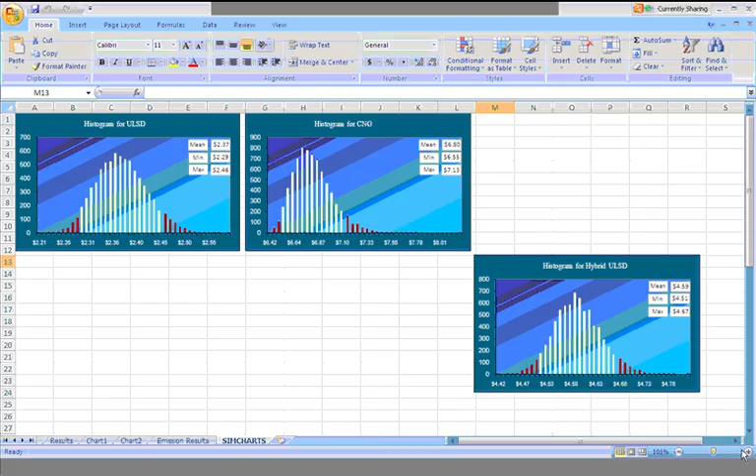After clicking on sensitivity analysis, the model runs a simulation and displays a set of figures. I'm going to zoom in to explain what happens here.

It takes the annualized cost per mile, which in this case accounts for the 80% federal contribution toward vehicle purchase. The $2.37 figure is the range of values we have for the ULSD fleet. If we were to purchase these 10 vehicles, it would cost us $2.37 on average per mile to run them. But the cost of purchasing this fleet could be as low as $2.29 per mile, or as high as $2.46, depending on how fuel costs change in the near future.

Because we take fuel volatility assumptions from the Annual Energy Outlook from the Department of Energy and embed them in the model, you get a bit of a forecast of fuel prices built into this application.

Next, the other histogram looks at the average cost for the CNG fleet, and you can see it's $6.80 on average. But the cost of purchasing this fleet can be as low as $6.55 and as high as $7.13 per mile, so there's quite a bit of variation due to the volatility of CNG prices.

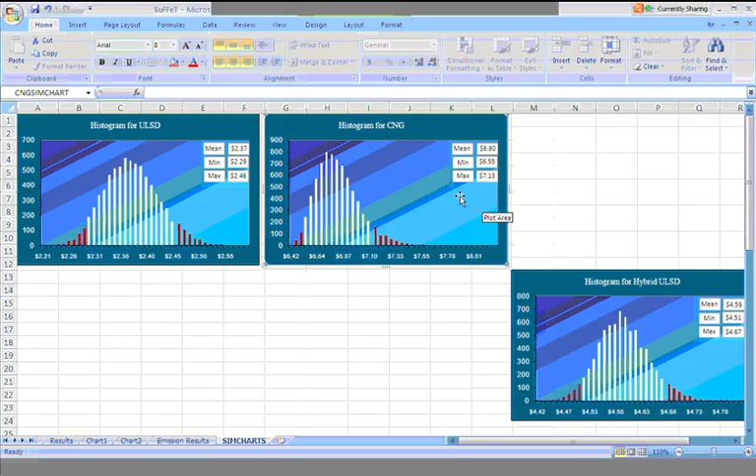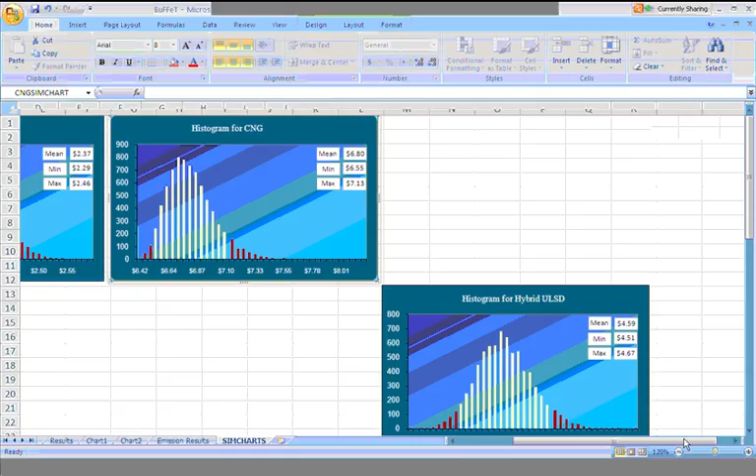Looking down at the other histogram, which displays information on the ultra low sulfur diesel hybrid bus — I'll zoom in to make it easier to look at — the average cost on a per mile basis is $4.59, as low as $4.51, and as high as $4.67.

Depending on how you're making your decision, and how risk averse you are about switching to alternative fuels, you want to take into consideration that on average you have a ballpark cost per mile, but we also have expected minimum and maximum ranges.

We define these as a very high level of predictability, because they're defined as 95% confidence intervals. That is, if you were to purchase this fleet over and over again, on average this is the cost you would face, with minimum and maximum ranges.

The sensitivity analysis is used to corroborate the results and take into consideration that the default parameters are subject to variation, in particular the fuel costs.

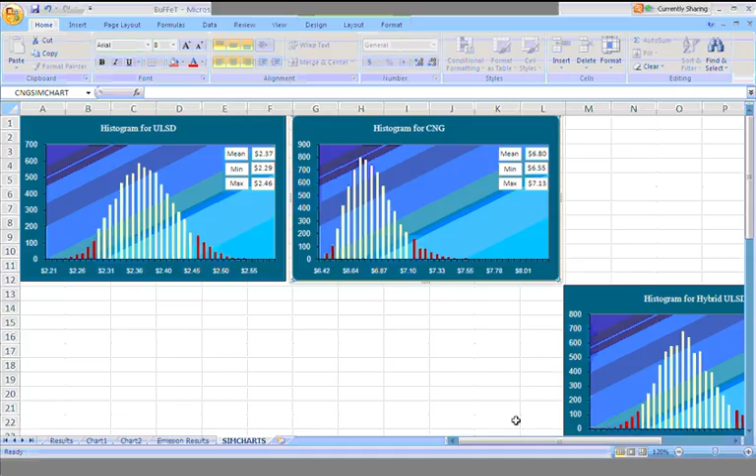Now that we've run the simulation and obtained the results, you might say: this is a very interesting exercise, we've evaluated this 10-vehicle fleet, but we probably need to fine-tune the analysis. You may wish to go back and rerun it, tweaking some of your assumptions.

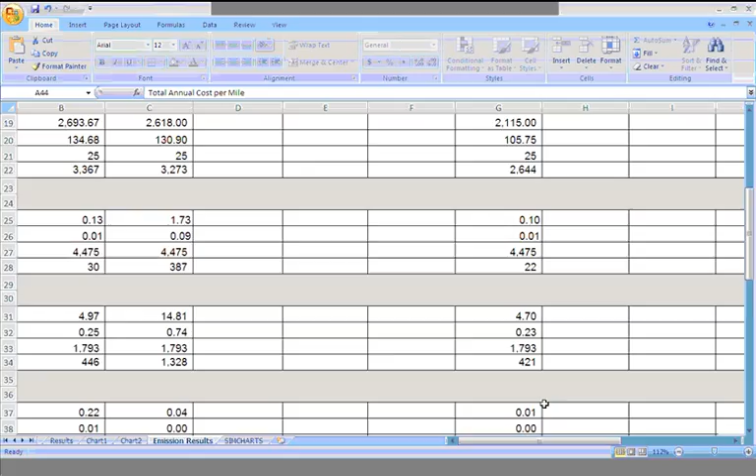All you have to do is go back to the Results work tab — I'll zoom in to make it easier — back to the very beginning of the evaluation, and run the analysis again. As you see, it loads up and displays the information as you first entered it, and now you can refine your analysis.

For example, if I were to rerun the analysis, one interesting case, Steve, could be that maybe we already have a CNG fueling facility in place. So on the capital cost side, instead of paying $2 million for the fueling facility, I'll put a 0, because we already have it and don't need to build another one.

I'll immediately click finish and display the results to show what happens to the analysis. Now you can see how much lower it goes on an annualized per-mile basis, comparing ultra low sulfur diesel and CNG: $1.18 versus $1.24 per mile. So you see the analysis can be tweaked and tailored to your needs.

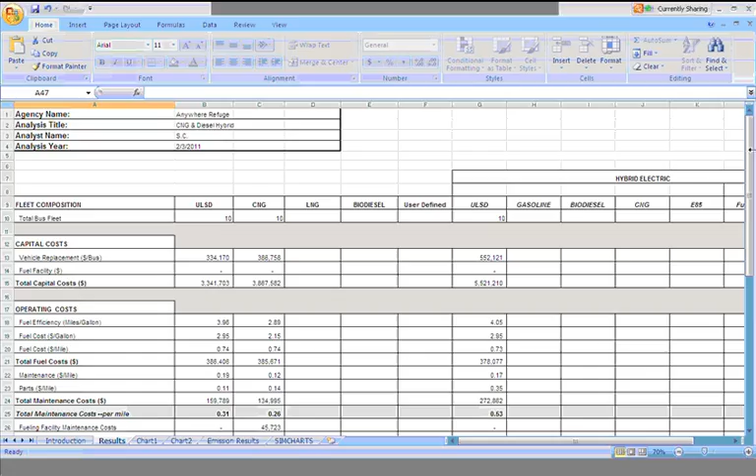I think we have, Amber, correct me, probably 10 minutes left, and we're eager to get some questions or feedback from you. That would be great. Great, thank you, Cecinio.